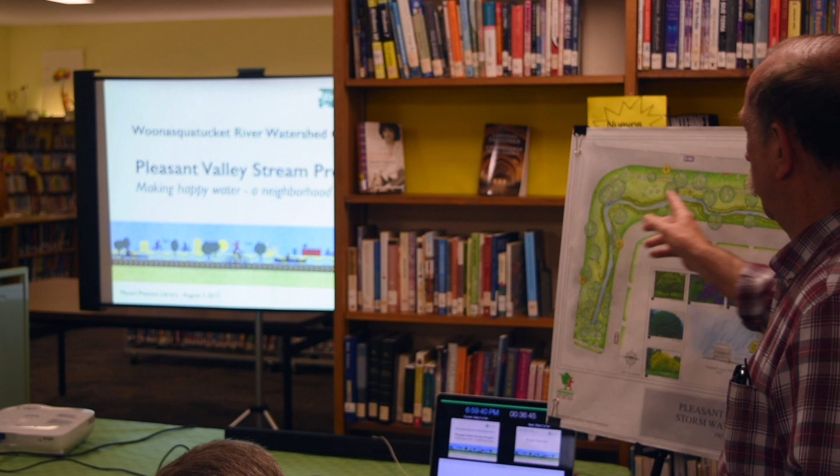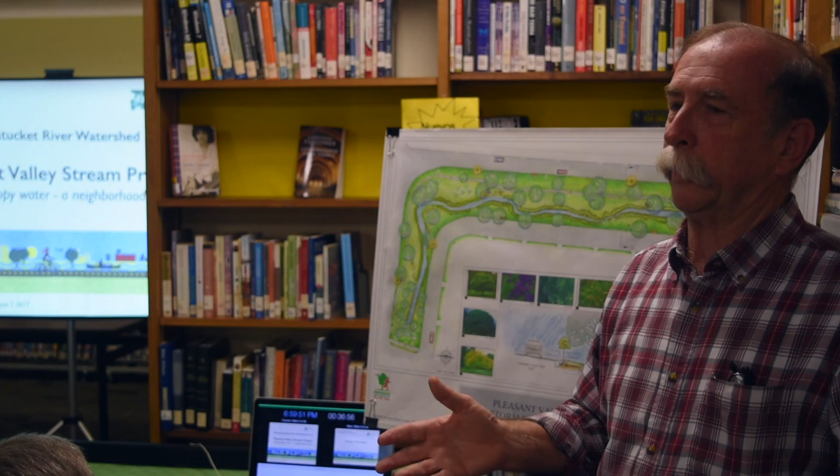So this project is an attempt to look at ways that we can manage stormwater in this neighborhood. It's a demonstration program, and we hope that it'll take off and that residents will work with us. The other part is to actually use a new type of system to treat water going into the natural area of Pleasant Valley Parkway, the stream area with the nice grass area around it. We're going to be putting in some tree filters so that the water going into the existing catch basins on this stretch would go through a tree system with its roots and some special soil, so that the water, instead of going directly into the stream, would go through this tree filter and remove a lot of the pollutants that would normally go into the stream.

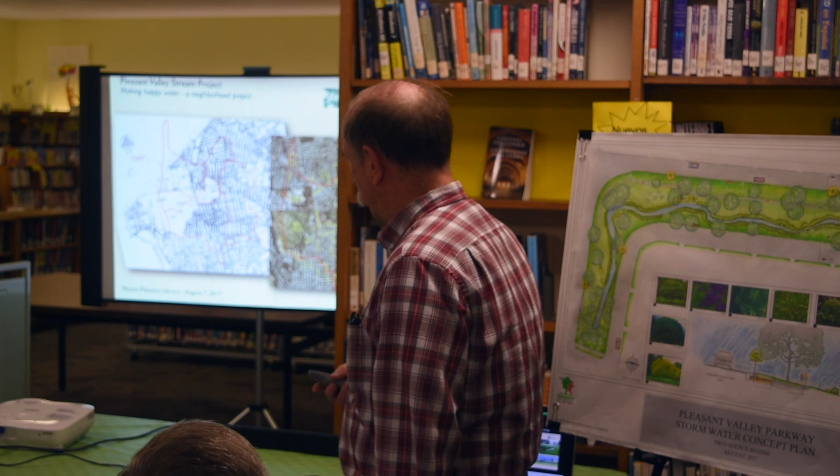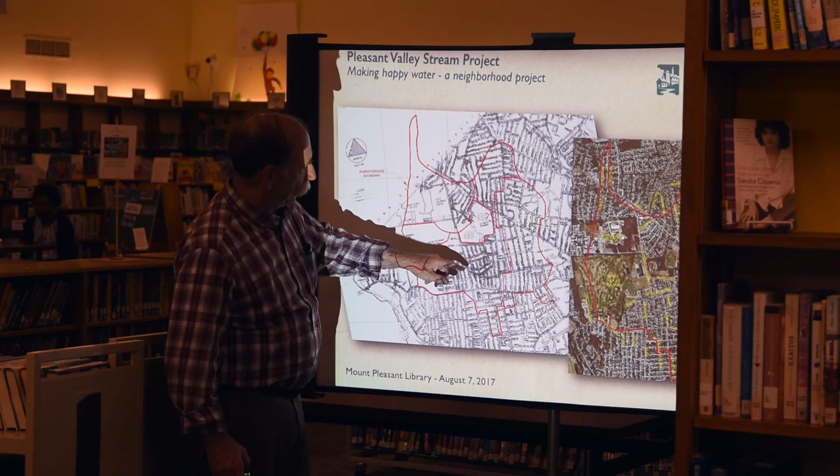So let me get us started. To the left, outlined in red, is the watershed for the Pleasant Valley Stream. Let me just move over here for a second. So this is the Providence College area. This is Rhode Island College, Mount Pleasant High School, LaSalle Academy, and this is Chalkstone Avenue. So all of this area drains into the Pleasant Valley Stream, and there's a lot of potential pollution that does go into the stream.

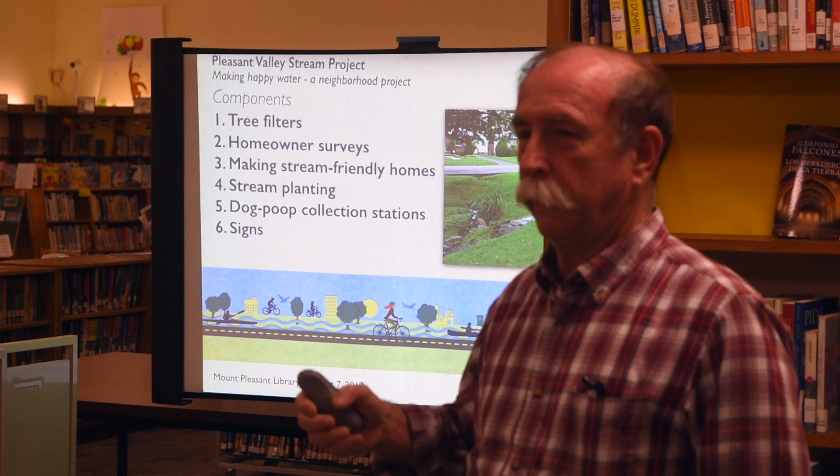So the components of our project are to look at a system for filtering the water before it goes into this stream area, doing some work with homeowners to make them what we call stream-friendly homes, and I'll show you what we're thinking about. Doing some more planting in the stream area to take out the pollutants. Putting in some places where dog walkers can use bags, dispensing areas, and make sure that when they pick up their dog poop, they put them in these bags and then put them in trash cans. And then finally some signs that we would put in front of the homes that participate in the program.

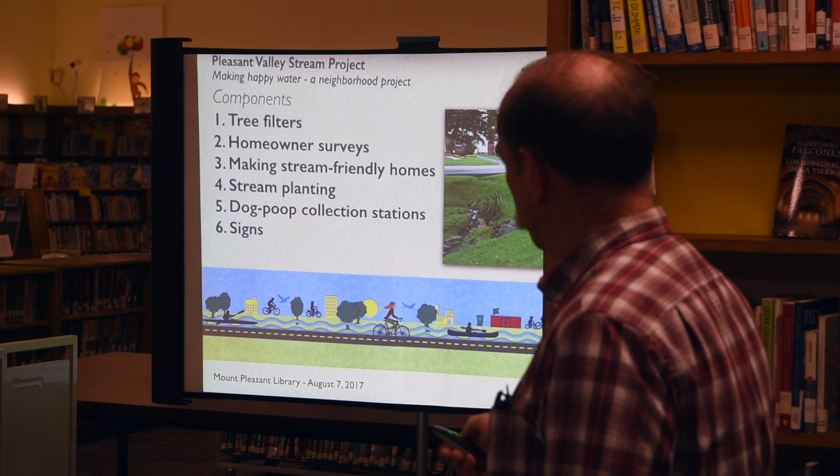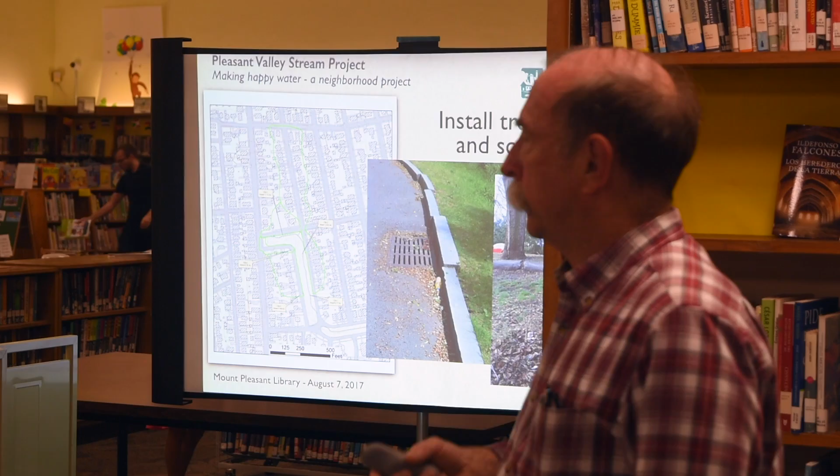So let me talk about the natural stream area. Right now, water goes into that catch basin, into that natural area, and out this outlet pipe directly into the stream. So whatever water and pollutants are on the street, they go directly into that pipe and into the stream. What we're looking at doing is intercepting that water. These are what we call scuppers.

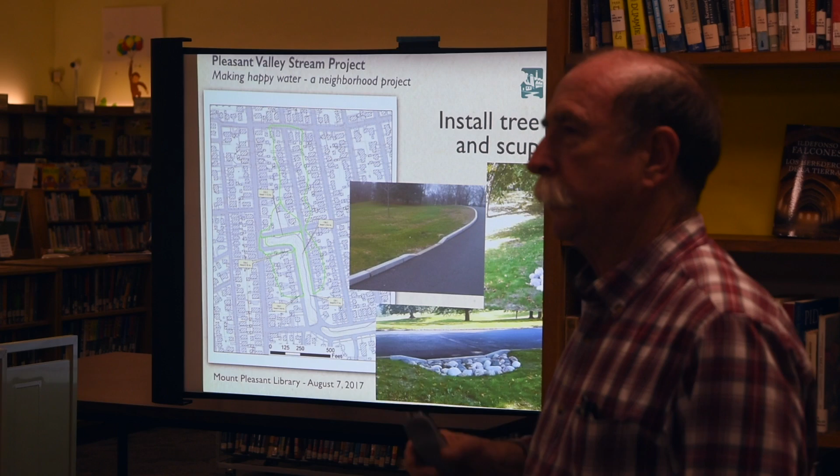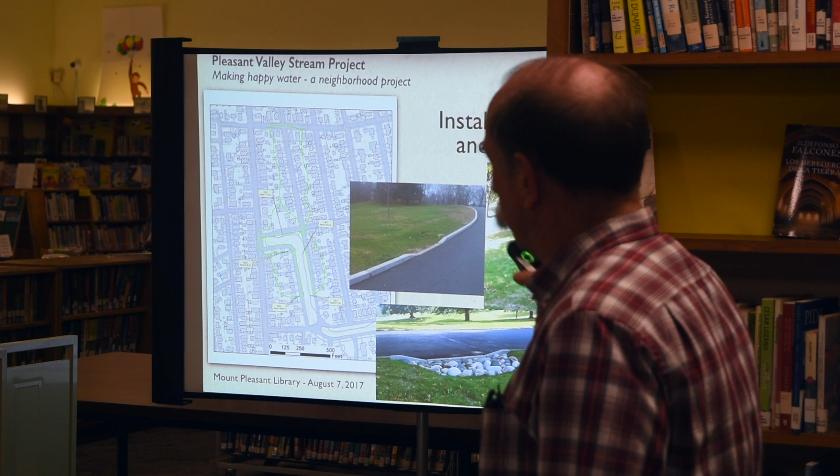These are examples in Roger Williams Park where instead of the water going into the catch basin, it's diverted into these little natural areas with river rock, and the water goes into the river rock and then into the groundwater. This alone would prevent a lot of pollutants from going into the stream.

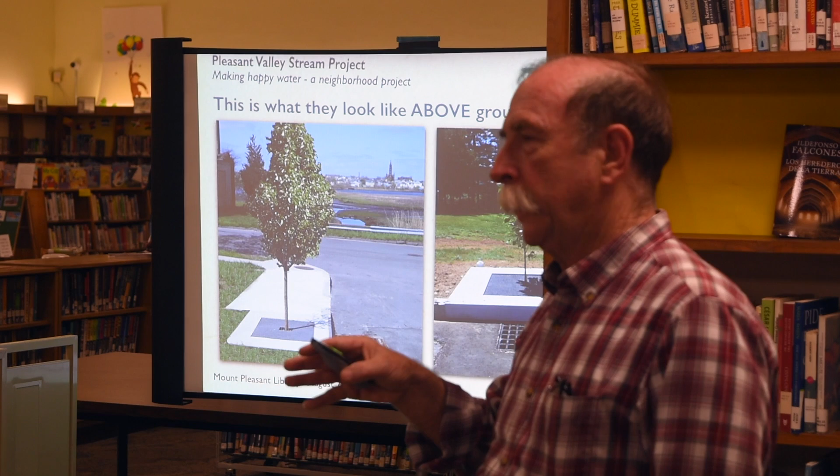But the thing we're really focusing on is putting in what are called tree filters, and we're hoping to put four of them on that natural stream area on Pleasant Valley Parkway. The water would go into catch basins and into a concrete box, and be filtered through the tree roots and special soil put under the tree, and most of that would be absorbed into the groundwater. If it's a really huge storm, there might be some additional water that flows in a pipe that eventually reaches the stream.

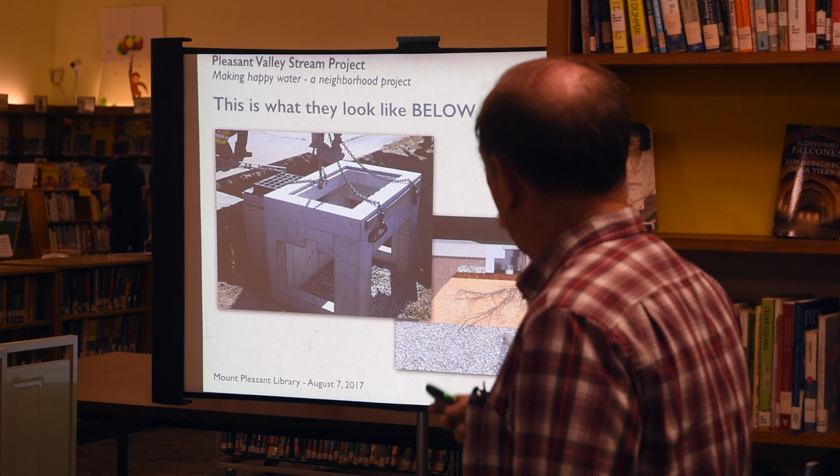These tree filters have been used in only a couple of places in Rhode Island, but also in Massachusetts and New York State, and they're pretty good in terms of removing pollutants. Total suspended solids, 85% removal; nitrogen, almost half; phosphorus, almost two-thirds; total metals, about two-thirds; and oil and grease as well. So it's an inexpensive, fairly aesthetic way of dealing with the stormwater coming off the roads into the Pleasant Valley Parkway.

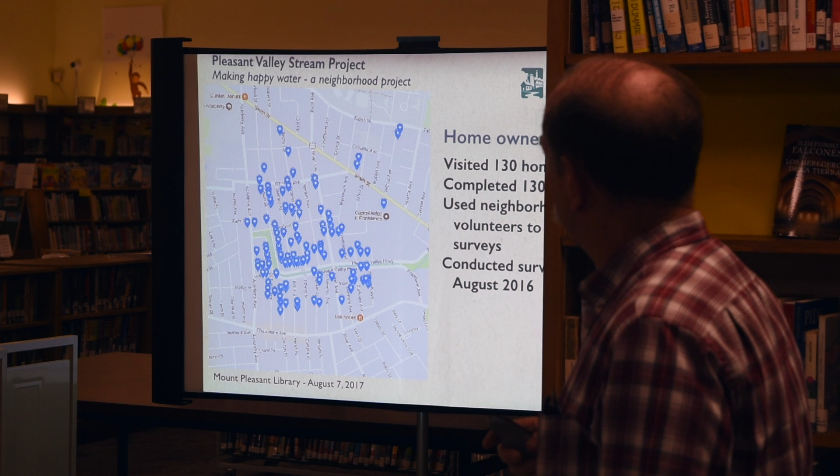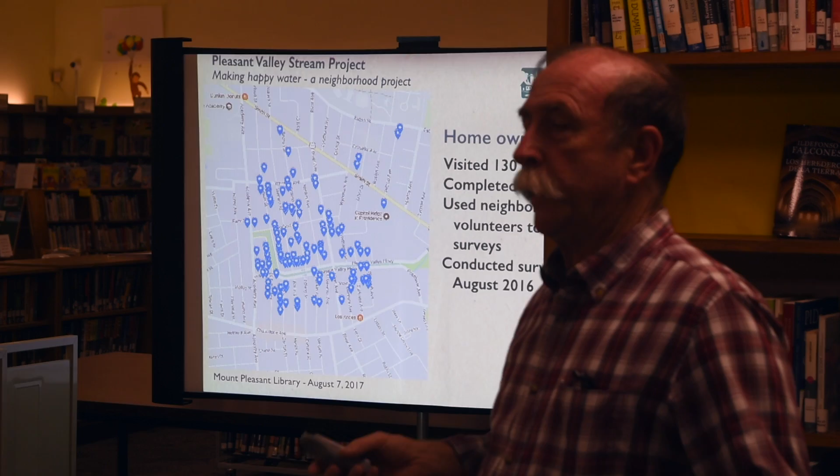Last July and August, or August and September, we surveyed homes in this area around the parkway, from south of Smith Street, north of Chalkstone Avenue, primarily around Academy, looking at how homes presently deal with stormwater - the water that comes off your roof, down your downspout, what happens to it?

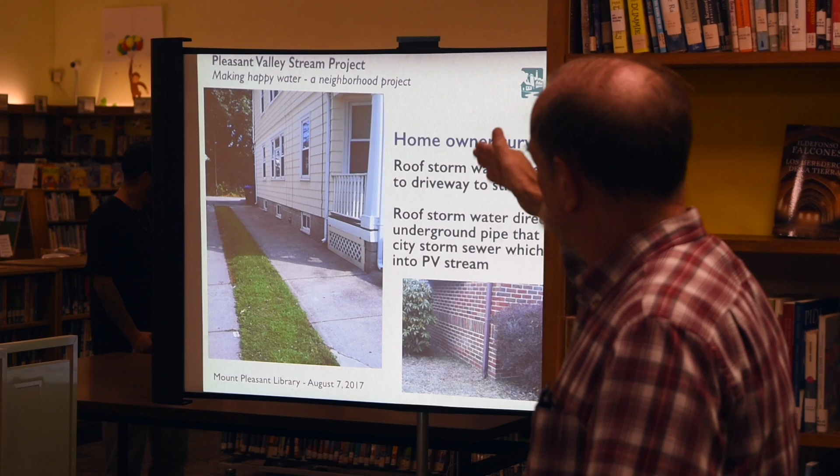Well, here's what happens to almost half of the houses that we looked at. The water comes down the downspout onto an impervious surface like a driveway and then flows into the street.

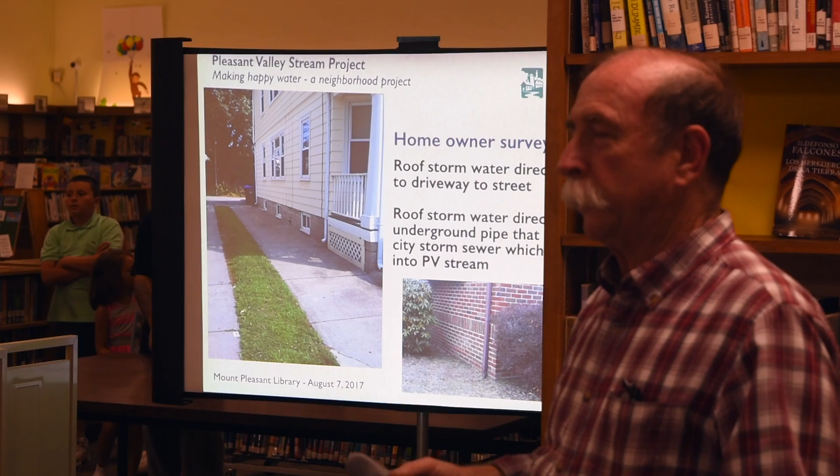Or, amazingly, there's a ton of homes in this neighborhood where these downspouts were directly connected to a standpipe that went into the city drainage system. You've seen a lot of these houses throughout the neighborhood. Back in the day when they built these houses, it was the most efficient way to get the water off the property into the city drain pipes and into the stream. We actually have a lot of examples like this.

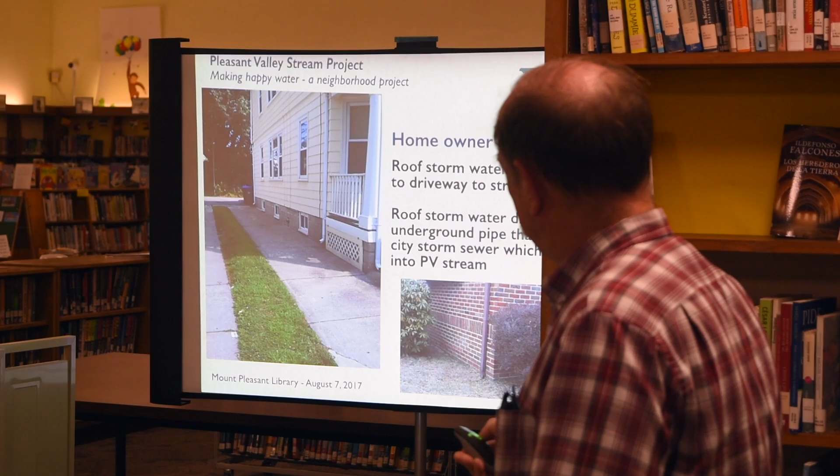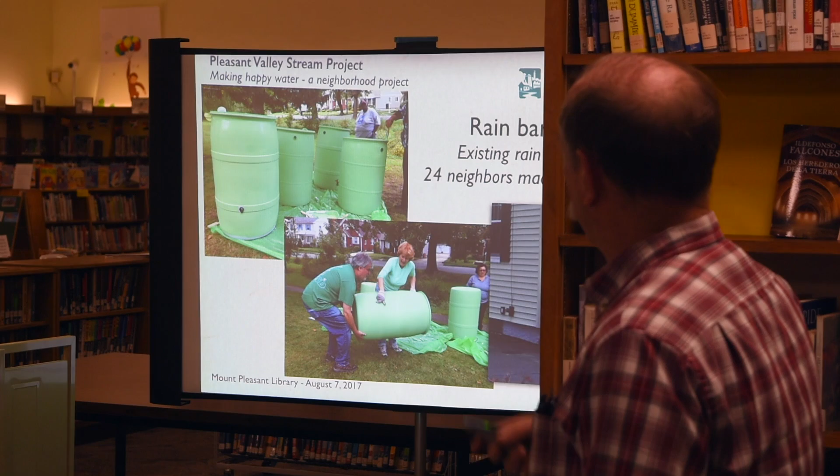So what can we do? Well, one of the things you can do is collect the water coming down the downspout into rain barrels and then divert that water into a garden area. Last September, neighbors in this area got together and built some rain barrels, and they were distributed to these neighbors. So this is one way folks can divert stormwater.

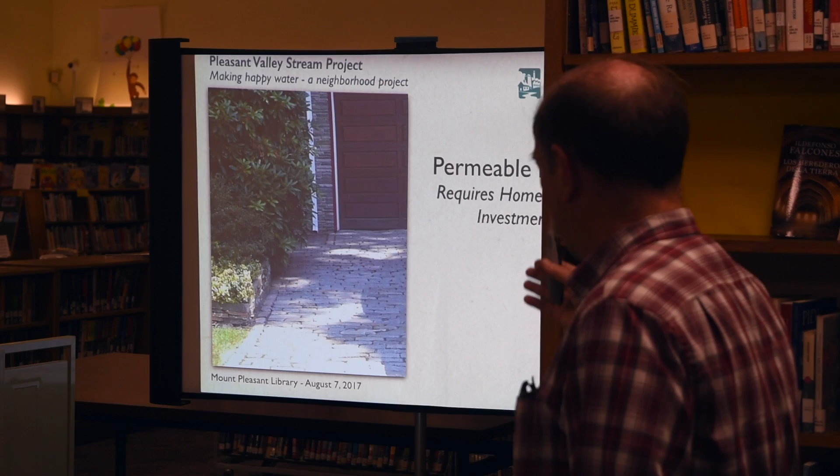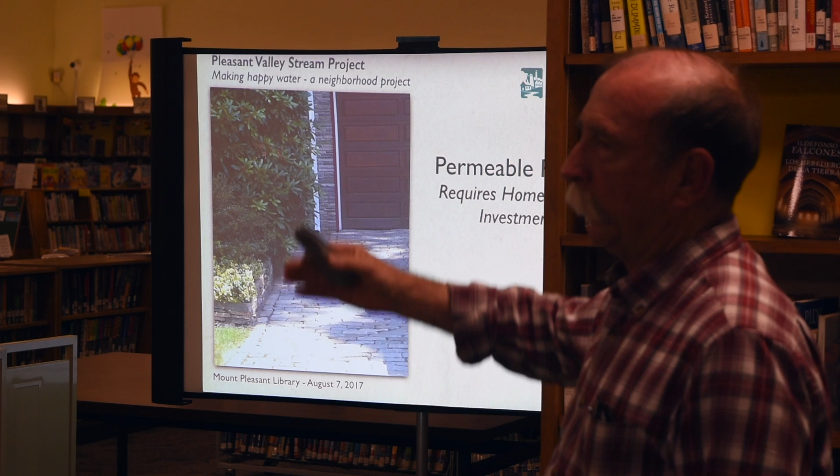Another option is to look at ways of making your driveway permeable. This is kind of an extreme case - nobody can afford to rip out all their asphalt and put in Belgian blocks like this. But at the base of your driveway, you could do a strip across the bottom, and the water would flow into a row of two or three of these, going into the Belgian blocks instead of all going out into the street.

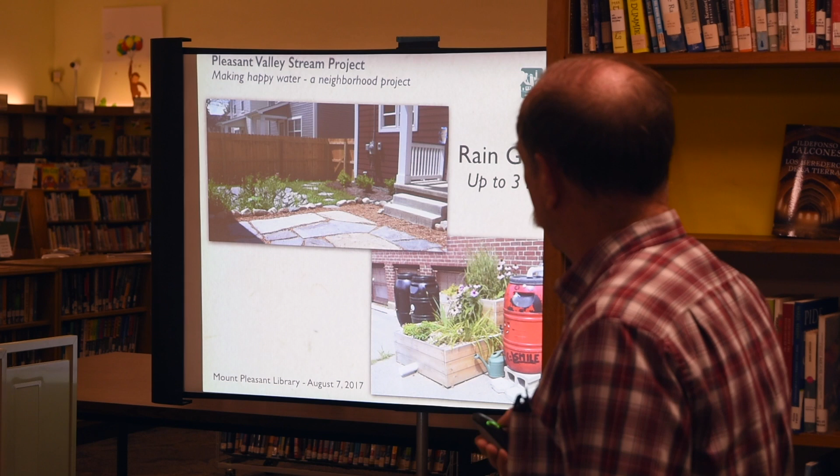Rain gardens - we're hoping to demonstrate how rain gardens can be used to divert stormwater, so you can take advantage of watering your garden. But the big thing we're going to be doing is showing homeowners how to divert stormwater from just going out onto a sidewalk or a driveway.

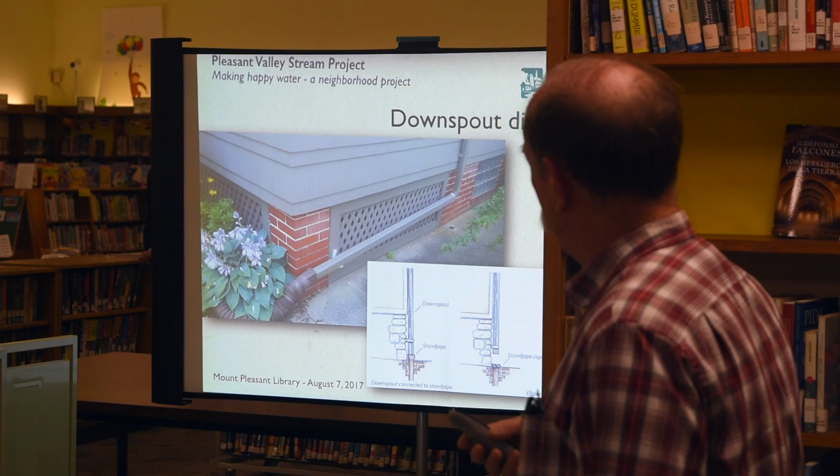There's an example in the left-hand slide where the downspout used to go into a hole in the ground, into a standpipe, and at one point it was just diverted onto the sidewalk area into the street. But without very much effort, the water's been diverted and put into a garden area. The slide on the right also shows how this might be done.

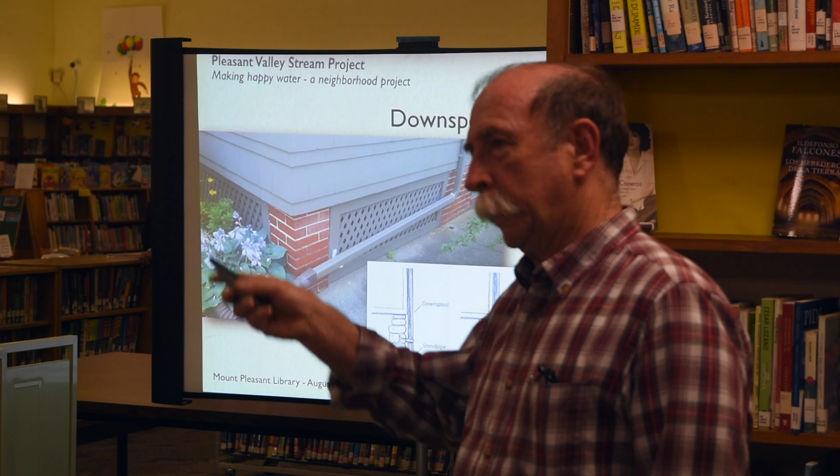So we're going to pick about 10 or 12 homes in the area and demonstrate how this can be done. Can we sign up?

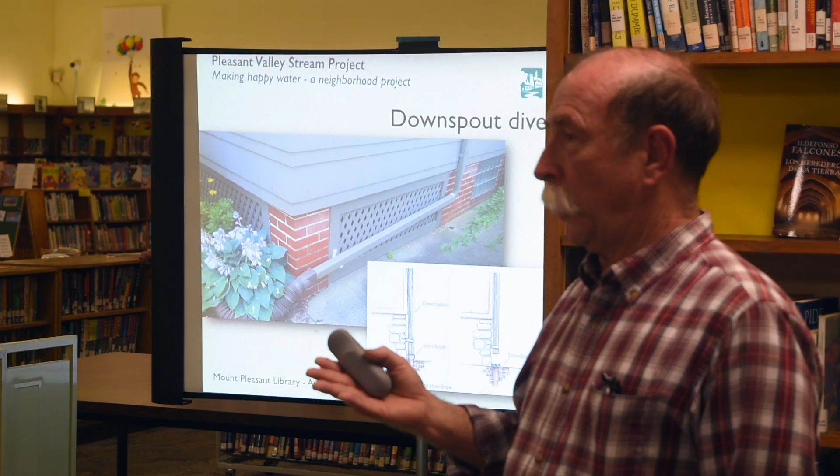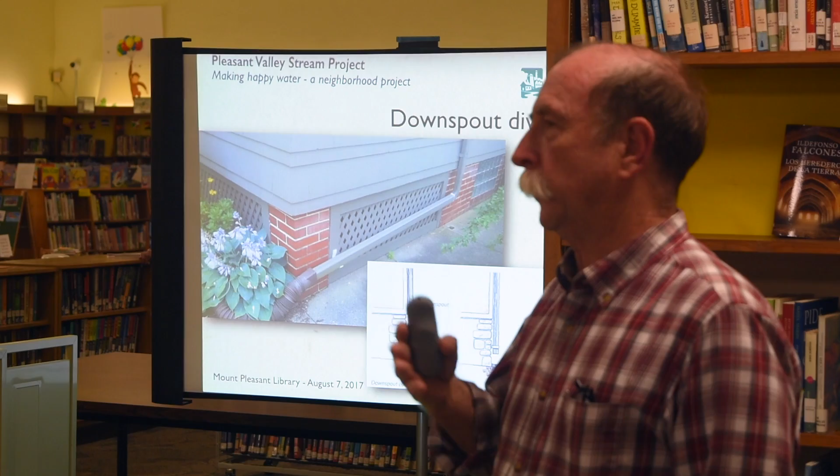While we're doing these, we're going to figure out what the cost is, and it's going to be fairly inexpensive for most homes. We're going to do a video of it to show how it can be done, and we're going to put it on the council website, the Woonasquatucket website, and the parks website, so that if you want to figure out ways to divert stormwater from going into the street and the stream and into your yard, we'll show you how to do it.

Are you paying for the cobblestone driveways?

For the 12 homes that we select, we may be able to reuse materials—for example, one driveway could be done with three rows of Belgian blocks.

Another way that water can be diverted is to put it into rock infiltration gardens on your property, which can be very nice looking as well.

We're also going to be doing some stream planting on Pleasant Valley Parkway. One problem with the parkway's natural area is that folks say it's too overgrown and we should cut the grass right down to the stream so we can see what's going on. But you actually need a buffer zone around the stream for wildlife and to filter out pollutants. Right now there's a ton of invasive species, just general weeds with no value except that they're about 4 feet high. So the project also involves taking out those invasive species and replanting natural plants you'd see along a stream, like iris, which are much smaller and lower growing, and which would enhance the value of the stream.